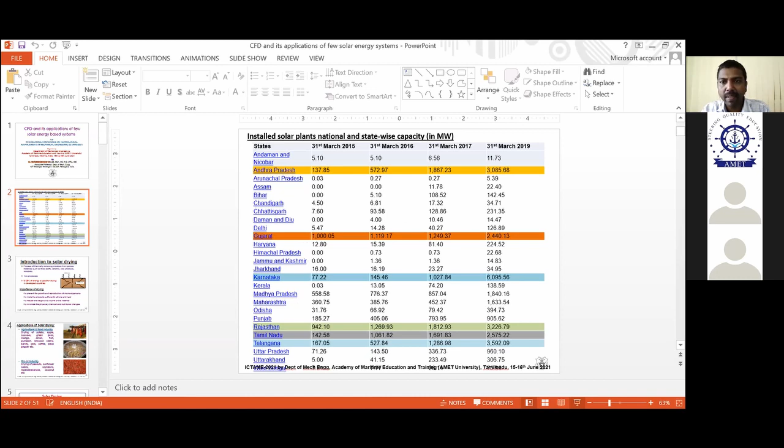You can see which state is first. I think Karnataka is doing best, with around 6,095 megawatts of power plant already developed. Who is second? Rajasthan is doing fine, with 3,226 megawatts. Third is Andhra, doing fine with 3,085.

Who is next? Tamil Nadu is next, capturing the 5th place. So: Karnataka first, Rajasthan second, Andhra third, and 4th place, Tamil Nadu, with 2,575 megawatts produced through solar plants. Then Gujarat comes next, so we are doing better than Gujarat. The remaining states, even Telangana, are also doing fine - Telangana is 3,592, which is actually the second one. So Telangana is the second one, and Tamil Nadu captures the 5th place.

Anyway, this is the present scenario of solar energy plants installed in the states. There are some states with less solar energy installation, which is one reason their usage is also less. You can see Himachal Pradesh at 22.68, Jammu and Kashmir at 14.83, and even Arunachal Pradesh, a poor sunlight state, having only 5.39 megawatts. But still, the other states are doing fine, and we should be proud of how states are utilizing this free, abundant energy.

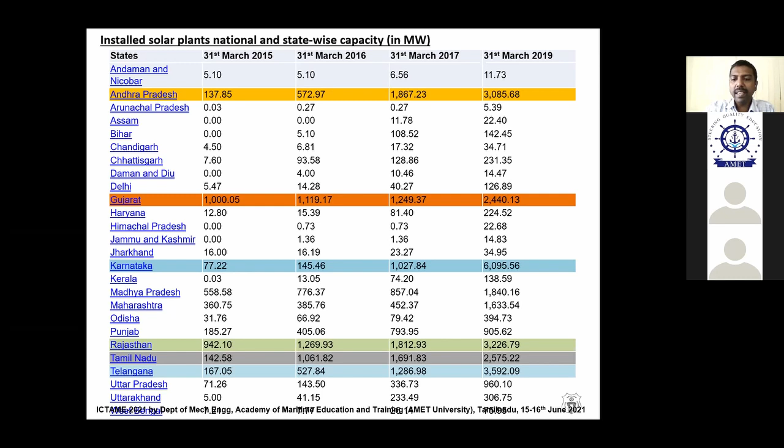Now we have to see how this solar energy will be used to run thermal systems. The first system is solar dryer. I have been working in this area for the past 10-15 years. So we will see what is solar drying, or drying first. What is meant by drying? In day-to-day life, we dry a number of products, including food products, building materials, textile, clay materials, and paper.

And then pharmaceuticals - there are a number of items. Among those, foodstuffs consume more energy to dry, and that's why this is one of the areas where I am working.

Usually drying consists of two processes: process 1 and process 2. Let us assume this rectangular object is a food product, or let's say it's a building material like a brick. Initially, the moisture on the surface of the product will be removed - that is process 1. When we put the object in open air, initially the surface moisture is eliminated; that is called process 1. Once the surface moisture is eliminated, the interior moisture diffuses to the surface - that is process 2. Then from the surface again the moisture is removed by process 1. That's why these two processes are involved in any type of drying process, including solar drying.

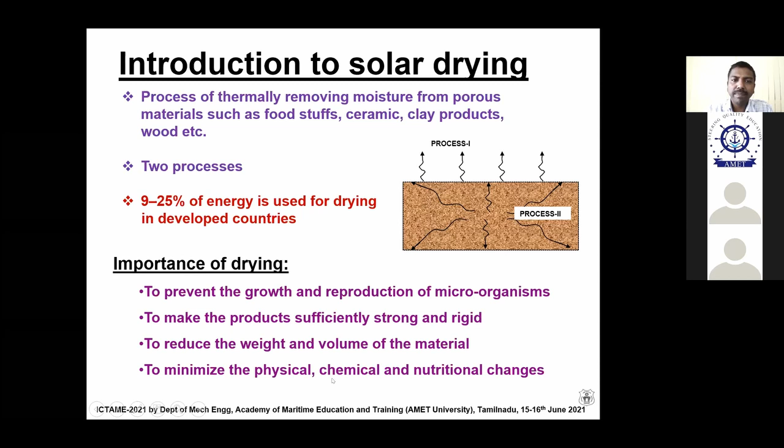And then finally, to minimize the physical, chemical and nutritional changes, we need drying. So these are the purposes of drying. Now you can see where these drying applications are used in different industries.

The first one is the agricultural and food industry, which is one of the major industries consuming much energy for drying applications. But if solar energy is used, the energy consumption will be less. That means the artificial or auxiliary energy usable is less because solar energy is totally freely available.

And in the agricultural and food industry, a number of food materials are dried. A few I listed here: potato, apple, cassava, green peas, mango, onion, fish, pumpkin, broccoli stems, barley, oats, coffee, black pepper, etc. Anyway, only a few I listed here, but almost all vegetables and fruits are dried nowadays.

And you can find a number of places with dry fruits shops. Almost all fruits are dried, and even vegetables nowadays come as dried food products in packets. There is much material available in the literature - I have taken almost 10 materials here. So almost all the materials we use in our home are covered.

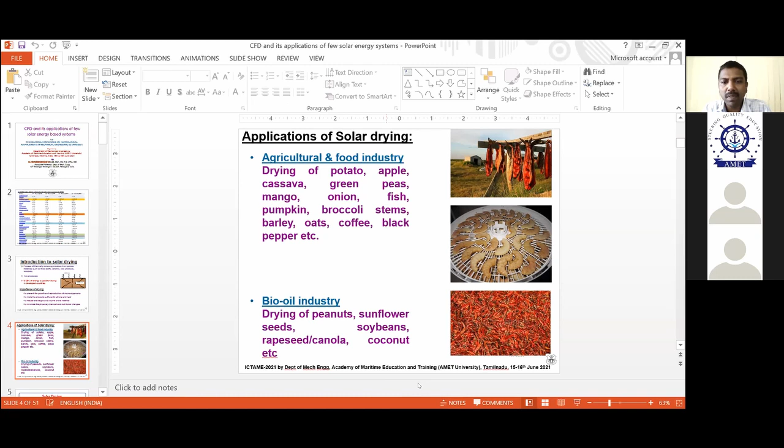So cassava is a yam which we get from the ground. For Tamil participants, I will tell the Tamil name - it is Maravalli Kilangu, cassava. It is dried. In my place, Kanyakumari district, we dry cassava. Anyway, wherever it is available, we dry it - almost all food products we dry.

And the next one is the bio oil industry. Wherever there are edible seeds, edible oils are taken from the seeds after crushing them. Those oils are used in food products like the normal oil we use - coconut oil, sunflower oil, palm oil, etc. There are also some non-edible oils which are used to generate oil, and from that we can run automobile vehicles, automobile engines, or even any other IC engines. That is called the bio oil industry.

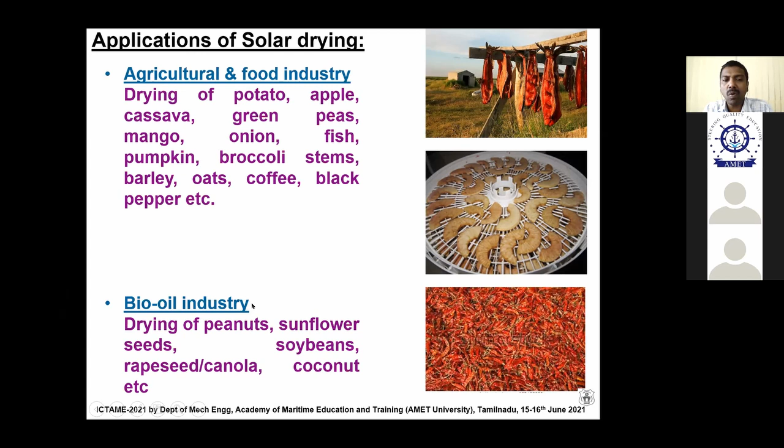Drying of peanuts, sunflower seeds, soybeans, rapeseed, canola, coconut, etc. - there are a number of seeds used to extract oil. So the bio oil industry is also a case where the seeds need to be properly dried before crushing, and then only we can extract good quality bio oils with maximum yield. So you can see that solar drying applies here too.

I am giving one definition here. Solar drying is the process in which the ambient air is heated by solar energy and it is passed through the chamber where the sample is placed to dry. So inside the chamber we are keeping the food product. The food product needs to be heated, so the solar energy is allowed to pass inside on that. That's why the process is called solar drying.

The hot air heats the sample and transfers the moisture from inside to the surface of the sample and then to the atmosphere. Whenever we heat the food product, it will be heated initially, and then it loses its moisture. That's why the heat and mass transfer process is happening simultaneously. This is one of the reasons drying is called a simultaneous heat and mass transfer process.

Here I have mentioned three types of solar drying. One is open sun drying, the first picture. The second one is direct solar drying. The third one is indirect solar drying. So we have to see what that is. The first one is open sun drying. Everyone is aware of this in rural areas or even in towns, people are drying food products sometimes on the road or sometimes on the terrace. There are a number of food products we are drying this way. This is open sun drying.

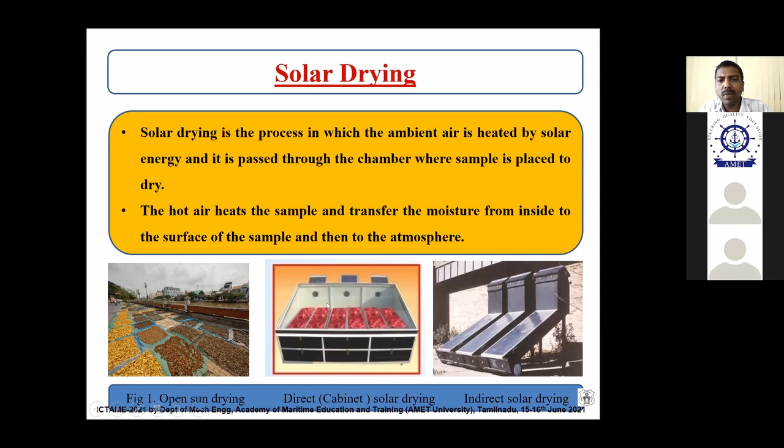Now we have to look at the need for solar drying. In rural locations, grid connected electricity supply is unavailable, hence solar dryers are attractive.

One of my friends, working at Pondicherry University, developed a number of solar dryers for poor farmers, because their electrical connectivity is not that much. He developed plants that can dry up to 25 kg of food product, making them usable in such rural locations.

From the last few decades, the energy policy of developing countries is changing due to shortage of fuel, propelling them towards renewable energy, because it is abundantly available in the environment.

Now let's see the availability of solar energy on Earth. The earth receives almost 1,74,000 terawatts of incoming solar radiation. One terawatt is almost 10 power 12 watts. Just imagine how much energy we are receiving on Earth.

But the usable amount is very less - usage is less than 1% only. That's why there is a lot of scope; we can still extract a huge amount of solar energy and generate a number of plants.

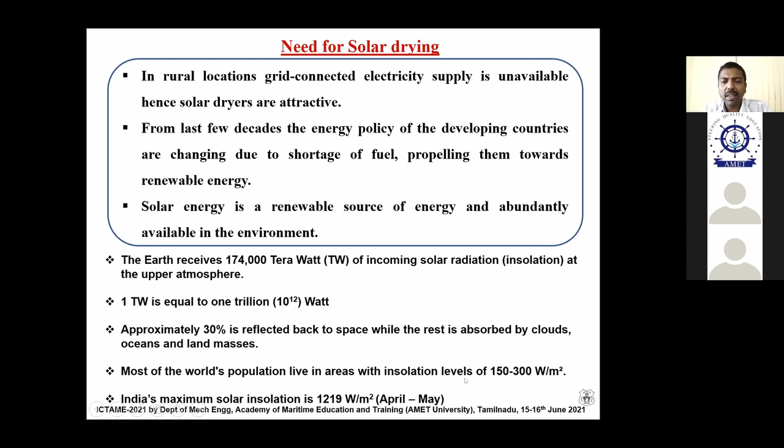This is even more in some cases, because we found this number in Warangal a year before - we measured the values and found it to be 1219 watts per meter square. Warangal is a very good place to extract a huge amount of solar energy. So while the world average is 150 to 300, our maximum value is around 1219 - we are in a good position and can do much work on this solar energy process.

Why are we keeping this corrugation? When air enters inside the inlet, it moves either on the corrugations or on the flat plate - there are two cases: case one is the flat plate, case two is the corrugated plate. We need to identify which one is better.

So you can think about it and then answer me in the text box, which one can be better.

The flat plate means the air will be entering and then heated in the solar air heater, flowing through the inlet gap and reaching the drying chamber. It takes the heat energy from the solar energy, and the copper plate also absorbs some quantum of heat energy, which is delivered to the air itself.

If you keep this corrugation plate, when the air enters it moves in a slightly zigzag motion, and because of that the turbulence level increases. If the turbulence level increases, automatically the heat transfer rate also increases. So that is the advantage in these corrugated plates.

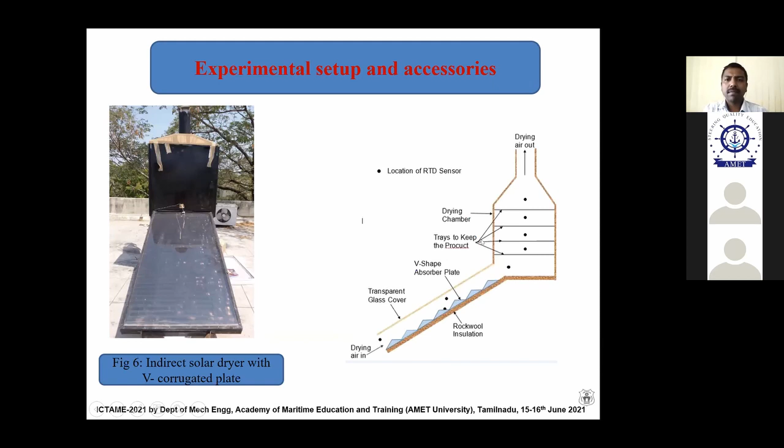Now we have to see how computational fluid dynamics techniques will be used to run these solar drying systems, because while developing particular systems, there are a number of parameters that need to be optimized. That optimization sometimes cannot be done by handmade or calculator calculations. We need proper numerical simulations, and according to that we can optimize the dimensions and make a setup.

So therefore we have to see the main procedures involved in CFD.

The first one is to apply the physical principles to the drying problem. For any problem, we have to apply the physical principle involved. Here also there is a heat transfer problem and a mass transfer problem. The moisture will be eliminated, meaning moisture evaporation will occur. There are also other functions like surface tension, capillary force, desorption, adsorption. There are a number of physical concepts involved, so we have to incorporate and take care of all the physical principles.

Then extract mathematical statements of flow through continuity, momentum, and energy equations. Initially we should start with this type of governing equations, and then incorporate the physical principles involved in the drying problem, and then we can finally get the mathematical statements, meaning the final governing equations that need to be taken care of.

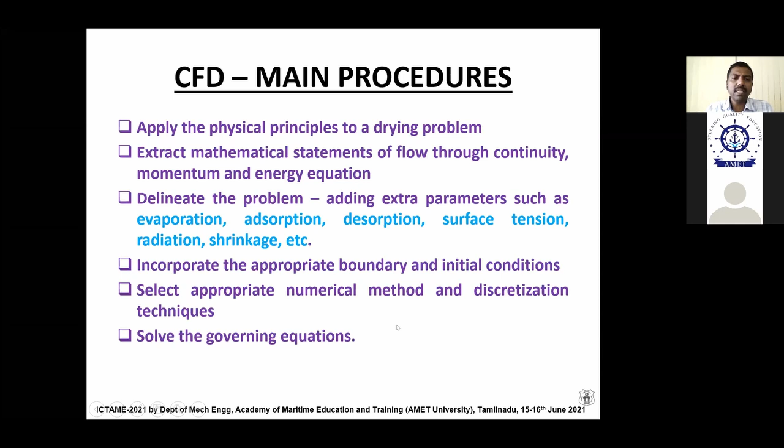So for the problem we solved, there were a number of other procedures involved, because when solving the problem, the food is heated and loses moisture. Therefore, there is one important parameter called the heat transfer coefficient, H, that needs to be assumed or estimated. We have to understand, if it is assumed, what problem arises in your numerical code, and if you estimate it, what is the accuracy of the solution. We found in one of our papers that assuming a constant heat transfer coefficient increases the error up to 35%. That type of assumption can be useful only for BTech level problems. For MTech or PhD level projects, it's better that this H value be estimated.

That's why we estimated this H value with the help of CFD simulation. We modeled an experimental domain through the Fluent software, sorry, ANSYS ICEM software, and then the simulations were run using Fastest 3D, another CFD software. But it's not only Fastest 3D - there are a number of softwares available, like Fluent, ANSYS ICEM CFD, and CFX, and OpenFOAM. There are a number of CFD tools available that we can use to solve it.

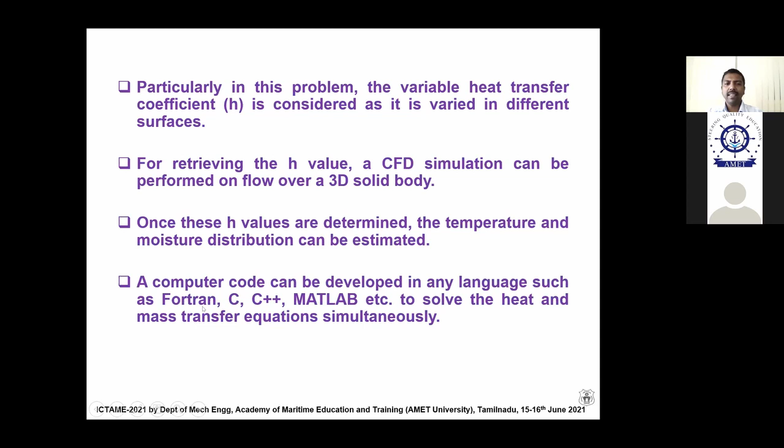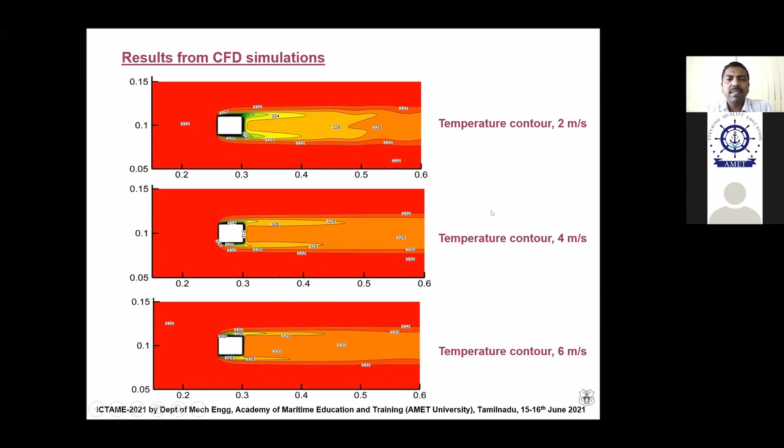There's a question from Dr. Amit Kumar about a comparative study of emerging rooftop photovoltaic for urban greenery. I don't know what the question is actually asking - it's in the chat box. Dr. Amit Kumar, Associate, greets. But the actual question is not mentioned, so later we can discuss what his question may be.

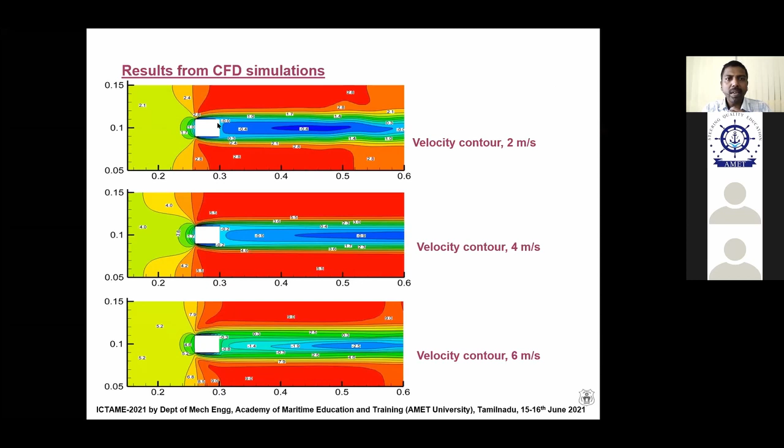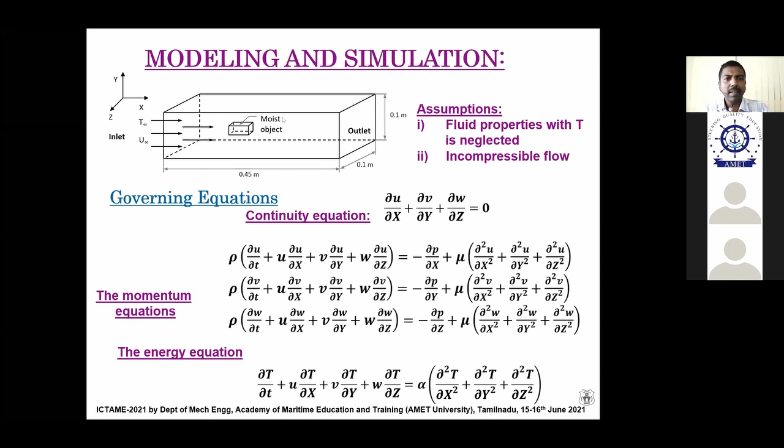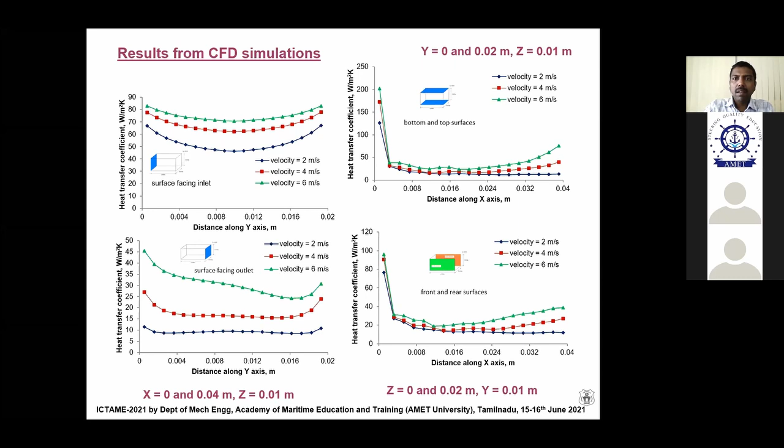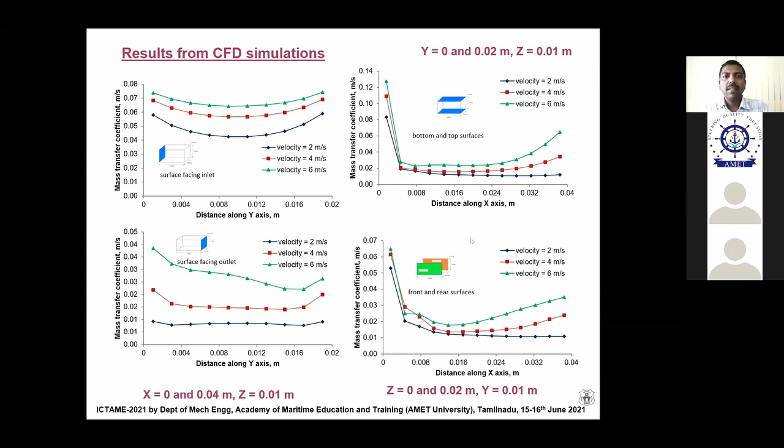So once you get the mass transfer coefficient, we can estimate the temperature and moisture distributions by solving the heat transfer equation and the mass transfer equations. Maybe you remember in your heat and mass transfer course, the mass transfer equation is almost parallel to the heat transfer equation.

It is true, that's why this is the heat transfer equation and this is the mass transfer equation. Instead of T, I have used M. Instead of alpha, which is thermal diffusivity, I am using capital D, that is the diffusion coefficient, or mass diffusion coefficient, otherwise mass diffusivity. So these two equations are parallel. This is one of the reasons heat transfer is taught much more, but mass transfer is not taught much in your UG - because mass transfer is also almost similar to heat transfer, you don't need to study the case again.

So now, if you want to solve these two equations, as I already told you, we need boundary conditions and initial conditions, and we need to select the appropriate boundary conditions. The boundary condition we selected is the convective boundary condition here: minus k into d(t) by d(x) equal to h into (t minus t infinity). These are the normal basic equations in your heat and mass transfer course.

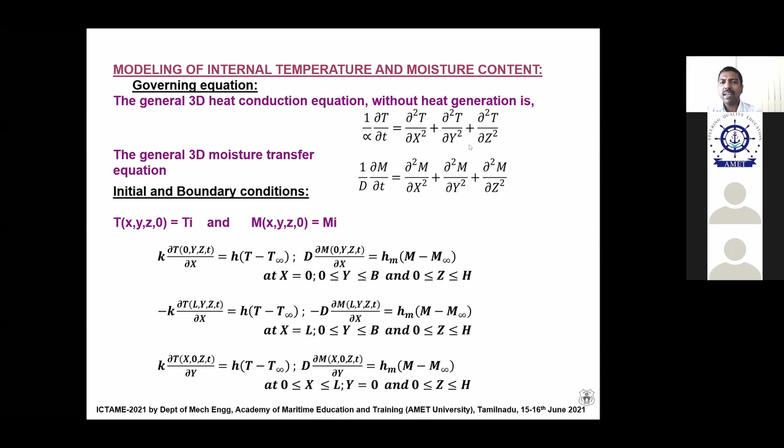That reality needs to be reflected in these equations and in the solution procedure. That's why the heat energy equations and the mass equations were solved simultaneously, and the solution was achieved at the end.

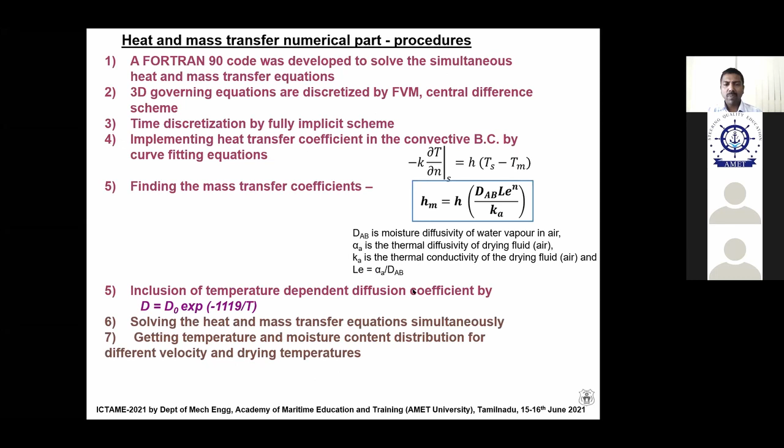There were some assumptions given, the solution procedure was given, and some discretization procedure is given based on the finite volume method, which you may already be aware of. Finally, we were able to get the profile. This is the temperature profile inside the rectangular food product, which is 4 by 2 by 2 centimeters.

It's a rectangular piece, a rectangular potato slice, 4 by 2 by 2 centimeters. In that case, we are taking the middle distance in the Z direction, the middle slice, to see what the temperature distribution looks like at different times.

See at T equal to 0.167 hour. 0.167 hour means... that's 1 divided by 6, so about 10 minutes. So for T equal to 10 minutes, what is the temperature profile in the first 10 minutes?

T is equal to 0.5 hour, which means 30 minutes. What is the profile at 30 minutes? I'll be coming back within a minute.

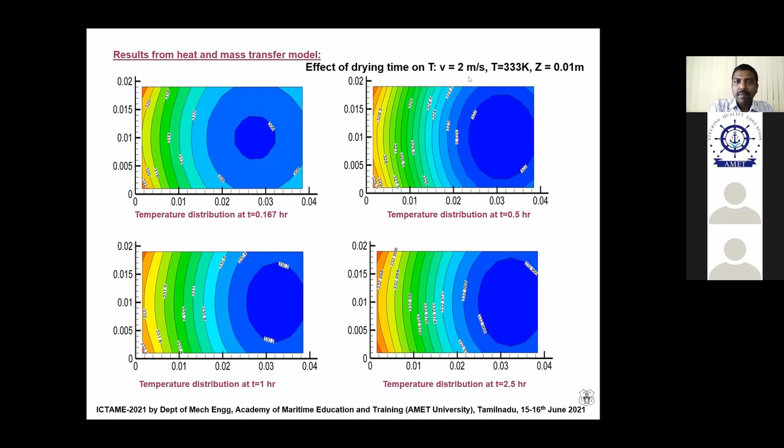This is for an airflow velocity of 2 meters per second. This type of CFD solution is needed because industry wants to know the approximate drying time for a particular food product - how long they need to use energy, or if they know from the start how much time is needed to dry a given quantity, they can allot manpower accordingly, prepare energy provisions, and if it's a solar dryer, design the setup accordingly. That's why these CFD solutions are essential for helping industries build their own setups.

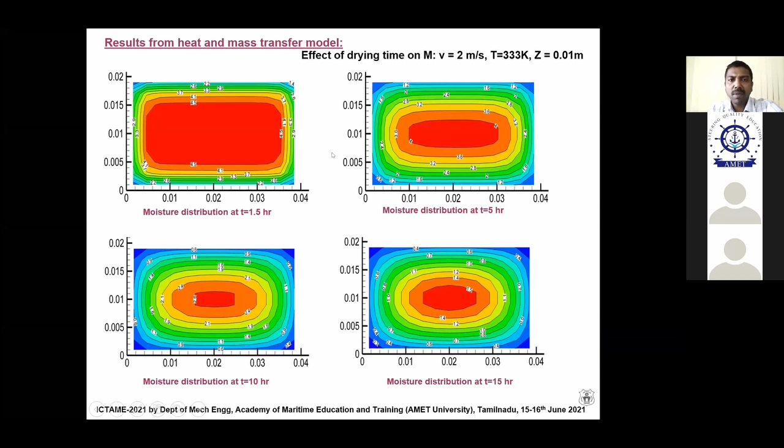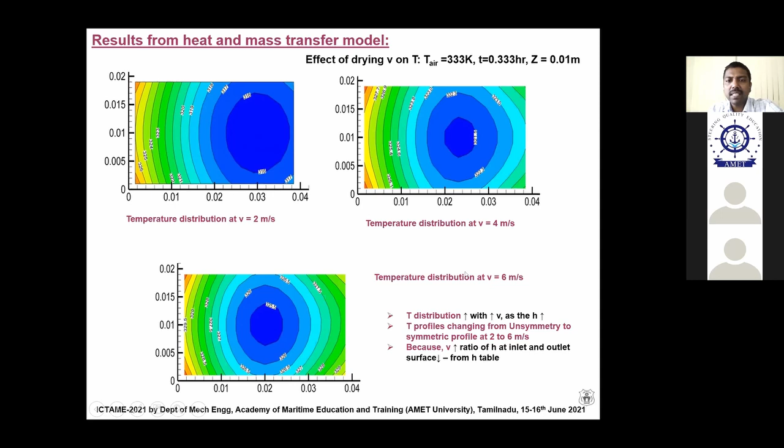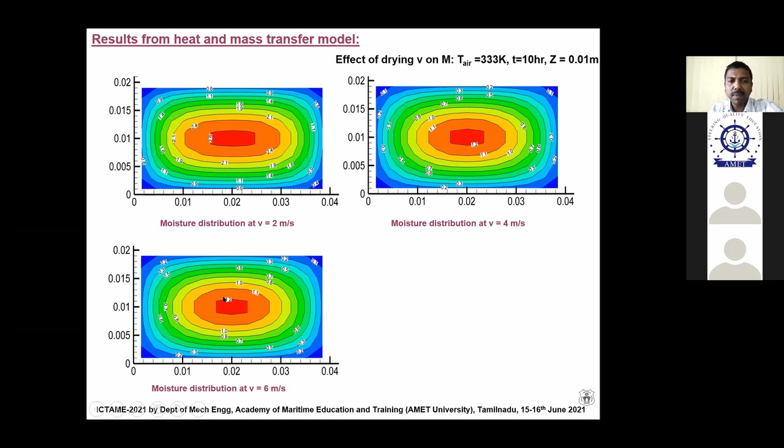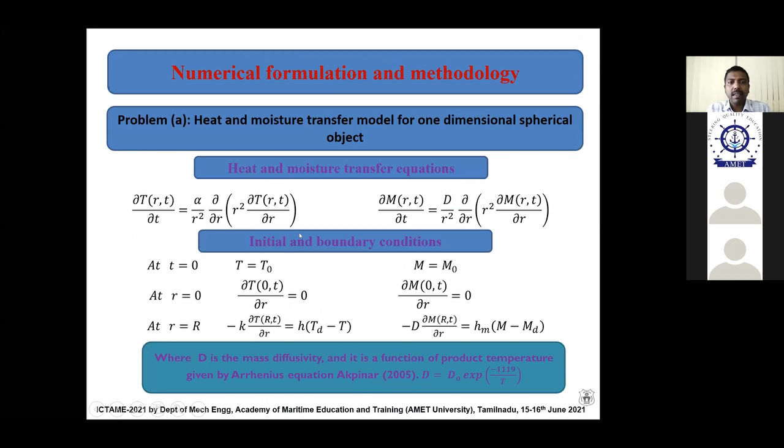Now, moving from the rectangular object to a one-dimensional spherical object - here are the one-dimensional equations. Since it's a one-dimensional unsteady state case, we need two boundary conditions, which were given, along with one initial condition already given. The equations were discretized similarly, and the solutions were achieved. This is for the one-dimensional spherical object, this is for the two-dimensional spherical object, and this is for two-dimensional rectangular and cylindrical objects - we've done almost all the cases.

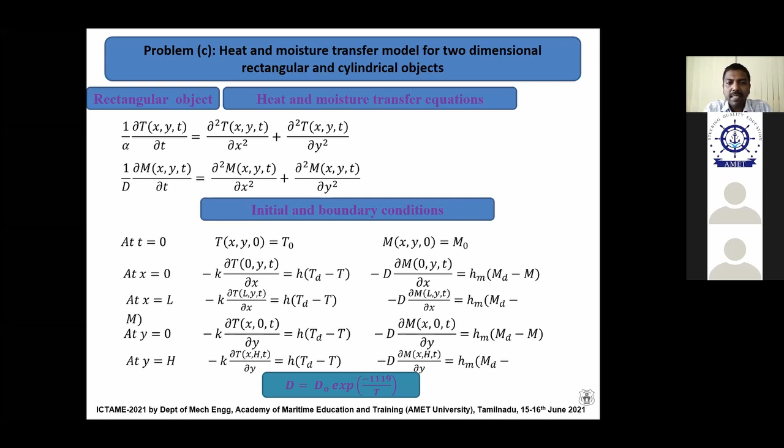All three geometrical objects have already been solved, and the works were already published, so I won't go into the detailed equations here - these are the final solutions. You can find the temperature variations within the food product at different times.

Initially, the temperature is around 303 Kelvin. As time increases to 600 seconds, 1200 seconds, 1800 seconds, the temperature of the food product gradually increases, while the moisture content gradually decreases - during drying, the food product loses moisture, so moisture content always reduces. You can observe that as temperature increases, drying time decreases; as air temperature increases, drying time also changes accordingly.

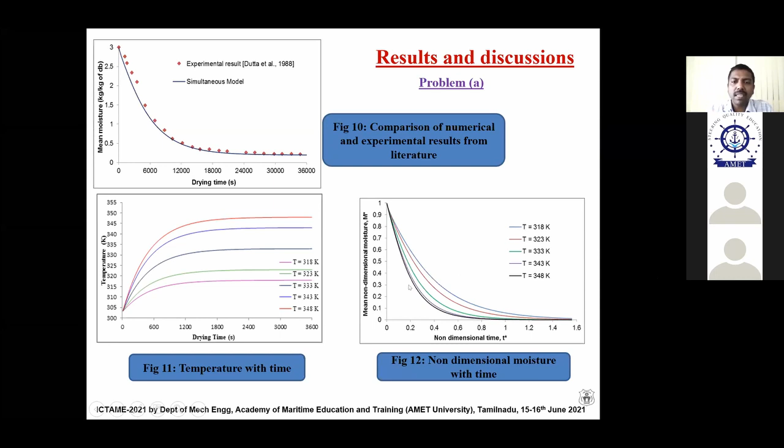This is one of the important solutions here. Let's say the food product has 100% moisture and needs to be reduced to 30% moisture - for a particular temperature, how much time is needed? That analysis was done for different temperatures. For example, the last line here is 348 Kelvin. At 348 Kelvin, to reduce moisture content to 30%, we need to dry the food product for up to 6000 seconds, which is almost 2 hours.

More precisely, it's almost 1.667 or 1.7 hours, or about 1 hour 45 minutes. So within that time, one can reduce the moisture content to 30 kg per kg of dry basis, or 30%, at a temperature of 348 Kelvin. Like that, we have done different analyses and could estimate the drying time required for a particular product.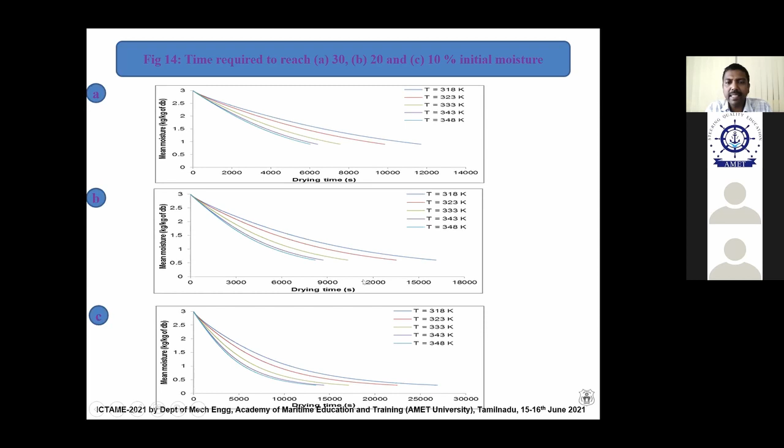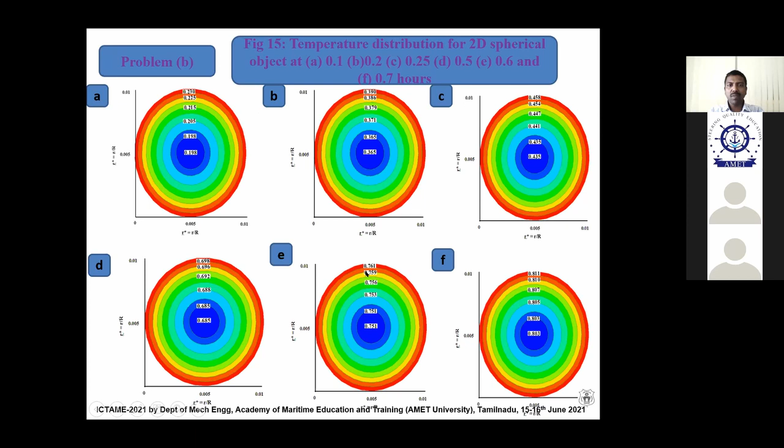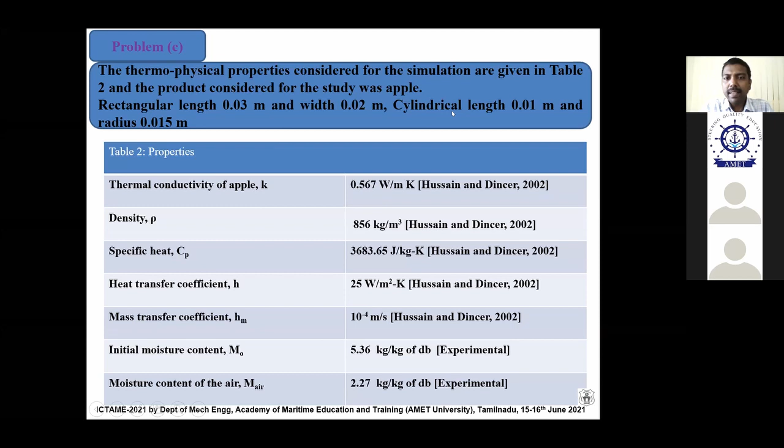So this is the moisture distributions. These are the properties we have taken to solve the problem. I think the product is, we solved for potato, apple, yeah this was apple. And then we solved for green peas also.

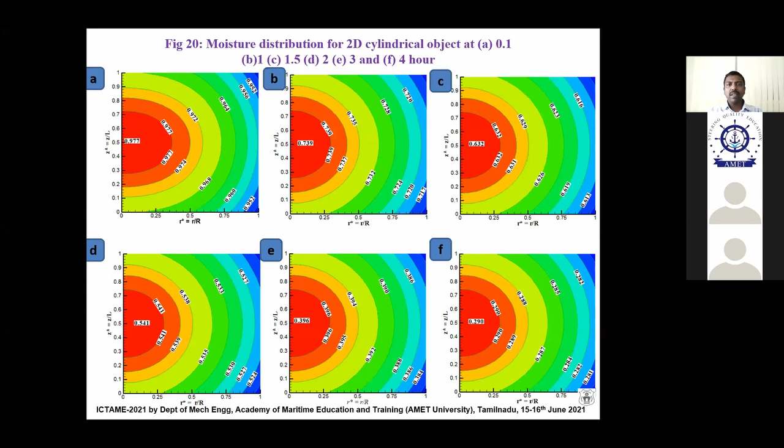This is for a cylindrical object. Okay, I simply move forward with the solutions. So you can also generate such type of solutions.

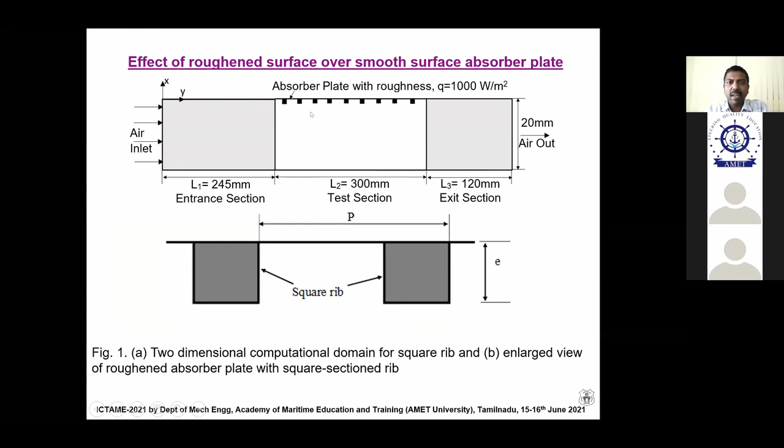So the next one is solar drying. Sometimes I mentioned if you are keeping triangle corrugations, or if you are keeping square corrugations, how the problem can be solved with the help of CFD, and which one can be recommended. So here my students solved two problems with triangle corrugations as well as square corrugations. Here I'm elaborately presenting the square corrugations, and we found that whenever the air is flowing through the square corrugations, if you see the zoomed portion mentioned here, the air will be coming and then interacting with the corner portion of the collector plate, absorber plate, and then moving like that.

Okay, this is the first square. If you take the second square also like that, third square also like that. So in every square, zigzag motions will be formed, then turbulent motions will be formed. This is one of the reasons the higher heat transfer rate takes place. That's why the corrugations help absorb a huge amount of heat energy from the solar energy.

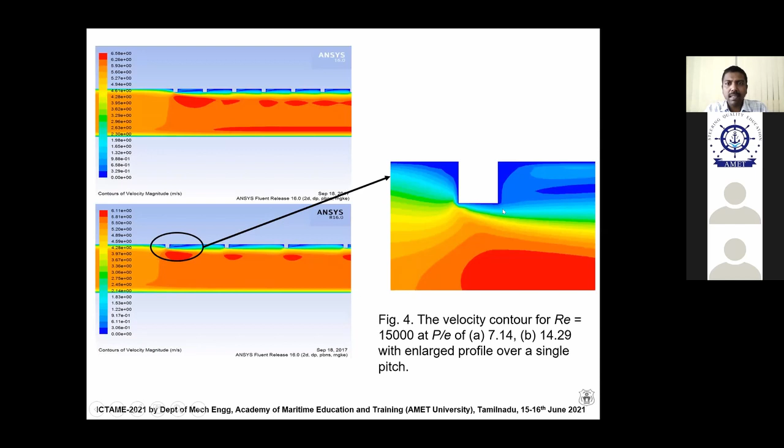These dimensions of these plates were already mentioned in our paper, I didn't mention here. Anyway, we solved this for square plates as well as triangle plates, and we identified that the triangle plates are better, and that's why we made the setup with triangular corrugations.

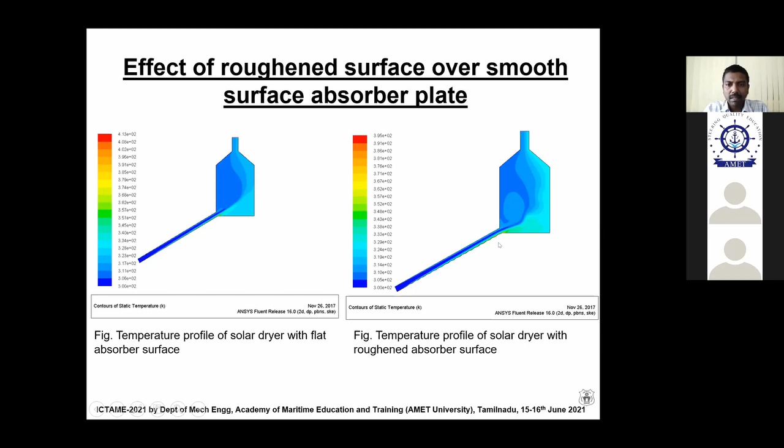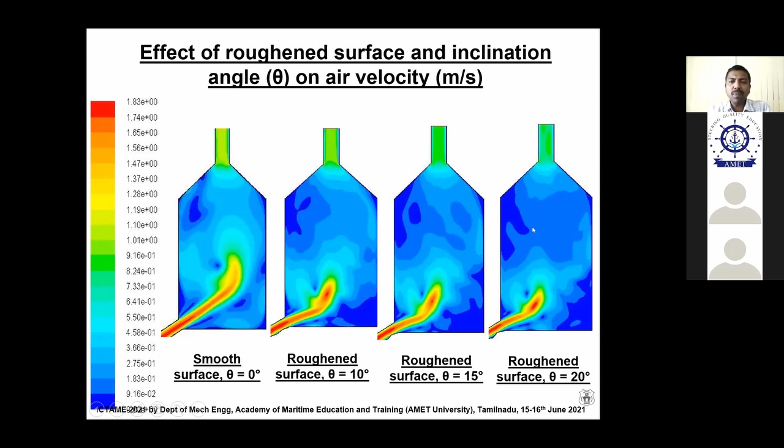That we could able to get. This is one of the inconclusive solutions, because we are not getting proper answers, but still we can say that the air mixing, the hot air mixing inside the dryer will be very perfect. Therefore, the food product will be easily and uniformly dried throughout the chamber.

So here also you can see this is the temperature distribution, and this is the velocity distribution. I think, yeah, this is velocity and this is the temperature. You can see that at theta equal to 20 degrees, the mixing is somewhat better comparatively here, because the blue portions will be somewhat less here.

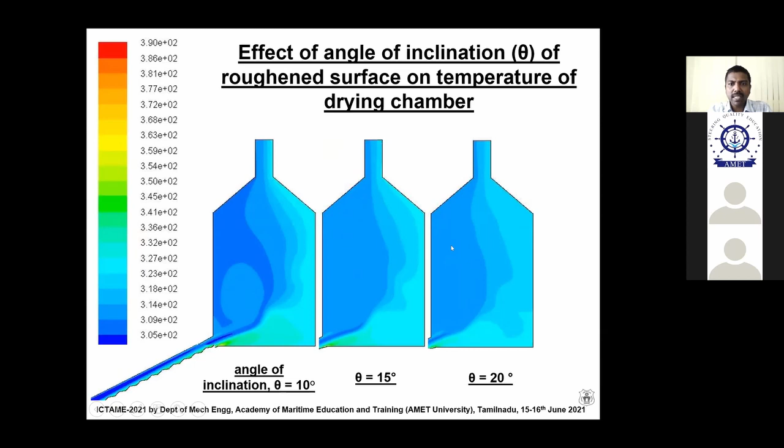Okay, so the next system is solar updraft tower. I don't think I have time or not, but I will explain what is the principle of the solar updraft tower and how the CFD solutions were used to run this solar updraft tower.

The solar updraft tower is one of the very simple plants with the minimum movable things, and it could produce very clean energy with the help of solar energy. So very long distance locations like desert areas or long seashore areas, or very rural areas, such type of areas will be fitted for the solar updraft tower.

Here we are keeping the collector plates with a particular angle, depending upon the latitude and longitude of the particular location, and then this is the bottom ground. Okay, and we are providing proper space for air entering inside, and then at the top we are keeping a chimney.

So the air will be entering inside, the collector plate will be collecting the solar energy and then heating the air inside. Therefore, the air inside the system will be heated, and outside air will be fresh air, not heated that much, because the solar collector will be collecting temperature up to sometimes 70 degrees Celsius inside the setup. The normal air temperature is 35 to 40 degrees Celsius, but it could see the temperature inside the setup is around 70 degrees Celsius. You cannot imagine that much temperature difference is created by the setup.

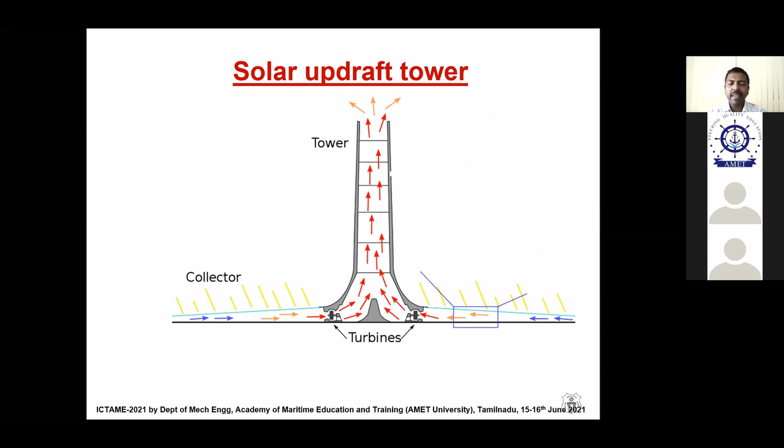The real plant was already built in Manzanares, Spain, having a chimney height of 194 meters. Just imagine a chimney constructed to 194 meters. It is tough to construct such things, but if you make the initial investment once, then we can generate free power, very clean energy, without disturbing the environment.

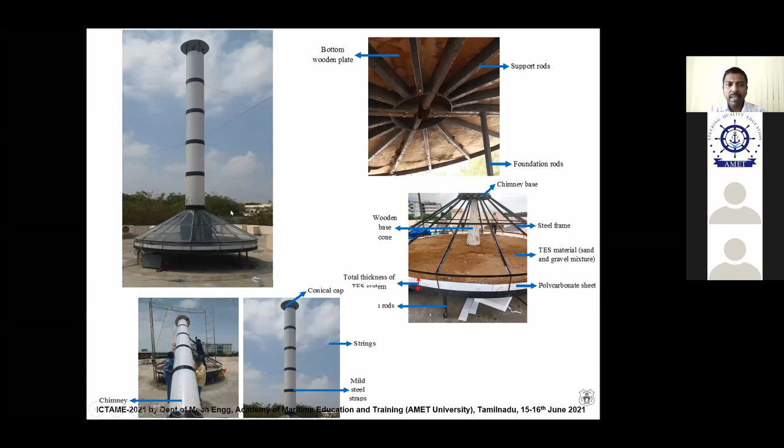There was one setup already developed in NIT Warangal. It is already installed in my laboratory, the solar energy laboratory. And there were a number of theories given, types of solar updraft tower given.

So how this SUT, or solar updraft tower, can be solved using CFD - that also we solved. We published almost 15 papers on the solar updraft tower, out of a total of approximately 100 papers. So we are doing good on this particular topic.

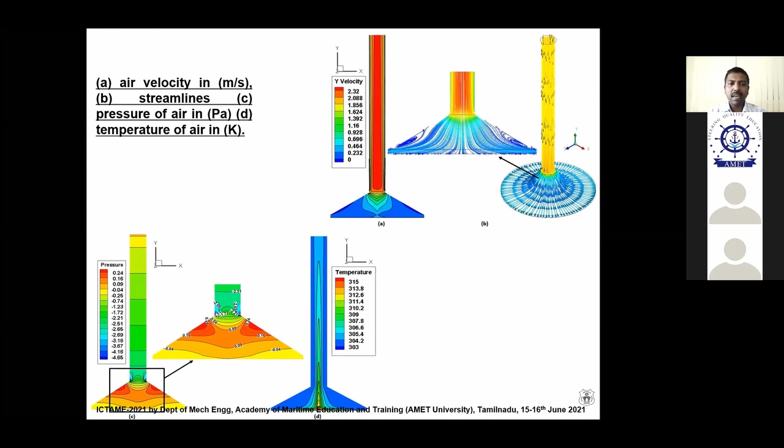Still, there is a lot of work that needs to be done. We are doing fine, so I don't think we can explain further.

So these are the tools we have used: ANSYS ICEM CFD for modeling, Fastest 3D, Fluent for flow analysis, Tecplot. The post analysis works were done by Tecplot, and Minitab and DataFit are used for curve fitting programs, and the programming tools used are Fortran and MATLAB.